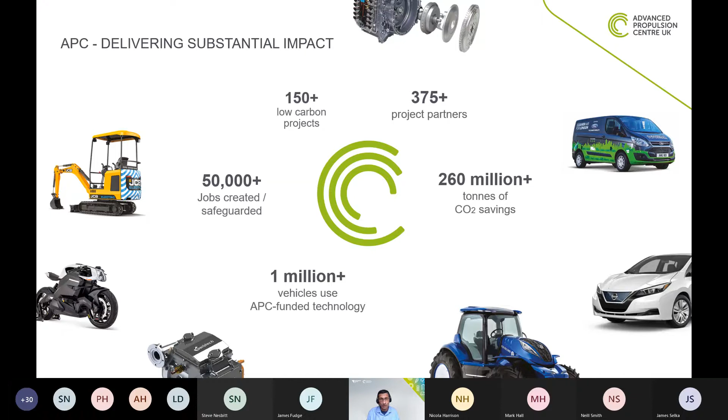Just a quick recap: the APC has delivered over 150 low carbon projects since it started in 2013. We worked with just about 400 project partners on these projects, delivering CO2 savings of 260 million and more, which is growing already. In fact, most of the vehicles coming out of those projects have reached a million on-road use as well. We've also done a jobs and safeguarding aspect of 50,000 plus, through our competitions and grant funded projects, as you'll probably know about.

However, where are we going now? There's another critical pivot in the road. It's a much accelerated CO2 program, as you know, from the petrol and diesel ban that the government made for 2030, and then the PHEV or HEV aspect that comes in 2035. It's meeting that 2050 agenda for net zero. That's crucial, so we have to look at automotive transport, which is 28% of the full footprint that the UK and Europe has to think through.

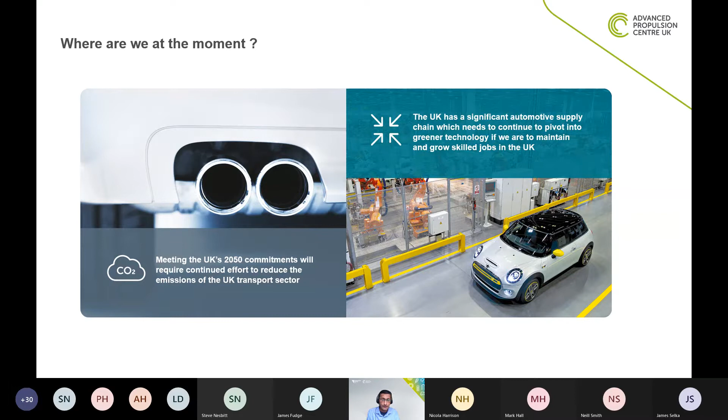The significant thing around the automotive supply chain that needs to be sorted out around greener technologies and electrification is where a lot of focus is being placed by government, and we'd like to make sure we get that right. One of the things that came out of this is last year the Advanced Propulsion Centre was able to have the ATF fund, the Automotive Transformation Fund. This is a brand new initiative, just under 400 million over 4 years to help progress that further.

We need to even stretch that funding capacity further. This one looks at batteries, motors, power electronics, fuel cells, all the sort of technologies required for electrification, but primarily around capital investment - how can we make manufacturing readiness for this is the key focus. Launched in June 2020, extremely popular, and it's one of those places where we can start to look at how new technologies can be brought into the UK.

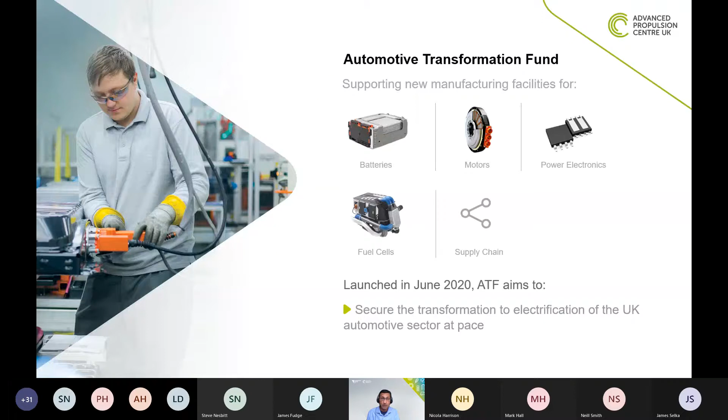What we've also done at the APC last year is launched an electrification report, available on our website. It helps articulate the opportunity within the UK: within batteries, 12 billion, within power electronics, 10 billion, and within electric machines, 2 billion. So there's 24 billion worth of opportunities.

What the report does is break down where those value chains reside - where is the cathode manufacturing and anode manufacturing for batteries, how do you go about making your decisions? What about electric machines - are you in the electric steel space, the assembly testing phase, magnet supply? How would you like to participate? This is our invitation to read the report to understand that part of it, the value part of it.

Just for this section today, we are going to focus primarily on roadmaps, and the APC delivered roadmaps with the Automotive Council. I guess, James, we've got somebody on unmute - if we could get that mute function enabled, please. Okay, so Automotive Council roadmaps.

The APC delivered the Automotive Council roadmaps last November at LCV, so some of you will be familiar with these. It was a virtual event at LCV where we brought out 9 roadmaps in different ways, where 3 of them are product roadmaps, looking specifically at the kind of fleets of vehicles that we have to understand the technology migration across them.

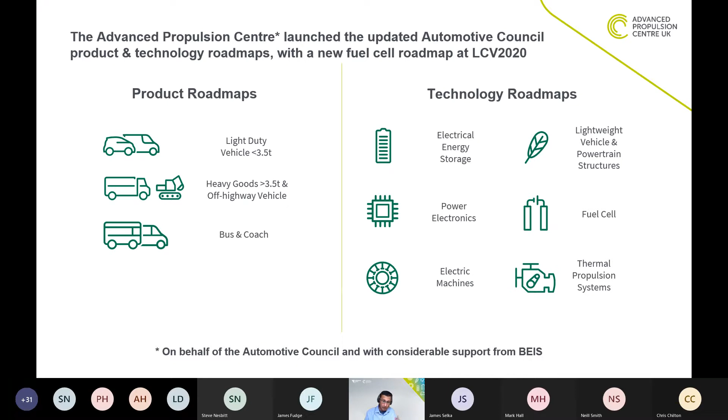So let's tackle how we built the roadmaps. Although this was done over a period in 2020 with the COVID aspects, we were able to use online tools and a way to bring communities together, running over 13 workshops across all the technologies, with 109 industry companies and different organizations participating in multiple workshops.

We then ran an online survey to ask experts around these technologies, with 38 participations and 147 industry organizations bringing in this rich feedback. Again, because it was digital through both Teams and Miro, we were able to reach out a bit further internationally to get that feedback, so the global reach this time round has been much bigger. The distribution across tier 1s, tier 2s, OEMs, academia, and other trade organizations is shown there, giving you a flavor for how we were able to get a lot of insight through this process.

So let me give you an example, and then you can take the time to read it in more detail. So the product roadmaps, I'll take you through the light duty structure to start off with, and the heavy duty and bus ones are there on our website, available for download. Together with it is a report as well, which I'll share more details about in a moment.

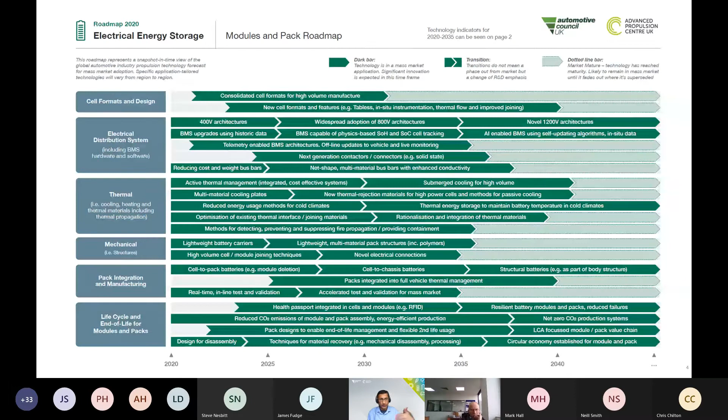Okay, so the next technology to move on to is electric machines. Similarly, a very rich area. We've broken out the roadmap so you can synthesize that by seeing machine architectures - what's happening with machine architectures going forward, what thermal management solutions electric machines will need, and specifically for electric machines, how do I play a role within windings, magnetics, soft magnetics? How does the winding technology evolve?

How can permanent magnets or alternatives to permanent magnets work? Soft magnetics and looking at laminations - what's happening with steels, how can this help going forward, or soft molded magnetics as well. And then manufacturing innovations are several parts of machinery, automation, and life cycle.

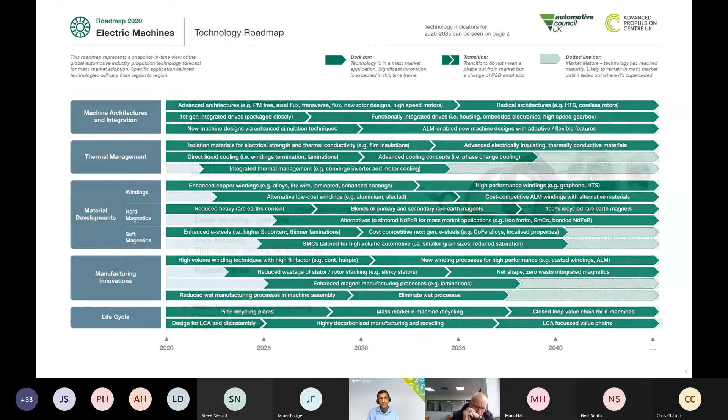So again, let's look at this from a supply chain perspective. From an architecture and integration perspective, you could easily look in terms of design and supplier commodities in modeling and simulation. If you've got integration services, putting things together, assembly services, bearings, axles, shafts - all of these are important for electric machines. Next, we're now operating them at very high speeds, generating lots of heat.

Also knowing that we need to operate within a particular optimal window to get the highest efficiency out of motors, which is 93% or more, 95% quite quickly. Cooling is important, thermal interface is important, insulation materials - all of that. If you're involved in that, you can easily participate in electric motors.

When it comes to the materials area we just mentioned about windings, magnetics, laminations, and their manufacturing, stampings is something very transferable - laser cutting, sheet stacking. You've got to get all the lamination stacks together, compress them together, and put a shaft through the middle. There's a lot of automated winding required, whether it be different types of winding structures like distributed or hairpin.

You will need precision engineering towards insertion of magnets with a glue system or a non-glue system. There's magnetization pre or post that you need to consider. And then, of course, the life cycle aspects of harvesting materials, with magnet materials being important. We have a separate report on magnet materials and the opportunity on our website as well, so please feel free to reference that if you need it.

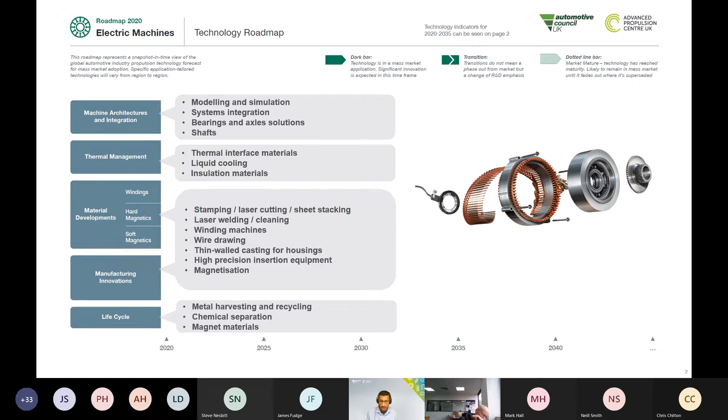Okay, and then the third one is power electronics. Now, this is a little bit more of a trickier one - this is a very specialist skill. It's not one that transfers in like we've talked about with batteries and electric machines. These are specialist areas of semiconductor manufacturing and packaging going forward. So it's more niche, but there are places within its cooling systems, within its materials, that you could look at playing a role within.

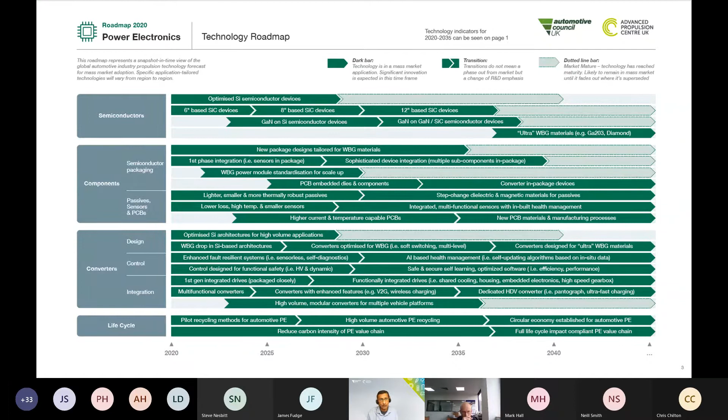So the way we've broken this out for you at today's presentation is to say semiconductors - right, we know it's highly specialized. You'll be looking from silicon to silicon carbide, going to GaN materials, gallium nitride based wide bandgap materials, but that's all about specialists within semiconductors growing these materials, and the cost curves needing to come down to a particular point for this efficiency to work. But on a vehicle, where will you find these components?

So you've got three places to look for these. You've got the inverter, which is bringing your DC power from your batteries into your motor, so on an inverter there's several power electronics there. I've just shown you at the bottom some of the roadmap targets we've got - DC to DC, step up voltage, step down voltage. All the voltage needs to be regulated depending on the function it's going to.

So DC DC on board, and then you've got the onboard charger, the charger itself that will need lots of electronics. Now each one of these has a particular need for semiconductors, packaging, passives, sensors. They'll have a whole host of bits, but they also need cooling, thermal management, insulation material, sensors, and then furthermore modeling, systems integration, and software development to allow these to happen.

So there can be places to participate in these technologies as you go into the vehicle integration topic around power electronics.

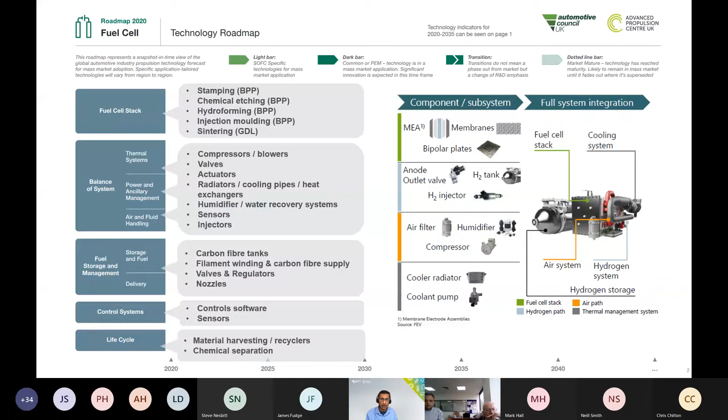So there's a lot of information to digest, which is why earlier this year in February we wrote a report per each roadmap, so you can take your time reading through. There's about 25-30 pages per technology to understand the background, which can give you a little more insight on how you'd like to play a role within this. The links at the bottom take you to the technology roadmaps page at the APC website or the product roadmaps page. Both have a report on it per the information I've shared with you right now.

The last thing to mention is that we're now writing up and publishing in the next few weeks, pretty much in May, new reports called Industry Challenges. These are research and innovation topics of the highest priority within each of the technologies I've taken you through, within batteries, within e-machines, within fuel cells. Where is the R&D needed? We list out the high priority topics, 10 or 12 topics, and within each one we give you research examples of the kind of places where academia, industry, and funding is focusing at the moment.

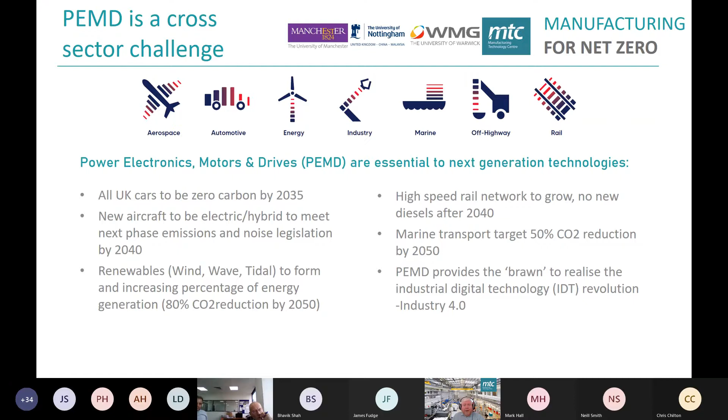As mentioned, we're part of a very broad national consortia of capabilities, representing 11 research and technology organizations and 23 plus and growing universities. This national network of capability is ready and at the disposal of industry to draw upon to support and enable the journey towards these net zero technologies. There's over £300 million of invested and resident equipment across these organisations that can be leveraged to best effect as needs be to support your respective journeys.

These regional clusters, notionally in the Northeast, Scotland, Southwest, South Wales and the Midlands—which is actually a band that stretches from the southeast up to the northwest of England—are available for everyone to use, everyone to access.

To put some context into the rationale here, here's an extract of 2 of the technology roadmaps that Bhavik's already presented, recently released by the APC and the Automotive Council. The key message in both of these is, roughly translated, about doing more with less materials in a smaller package.

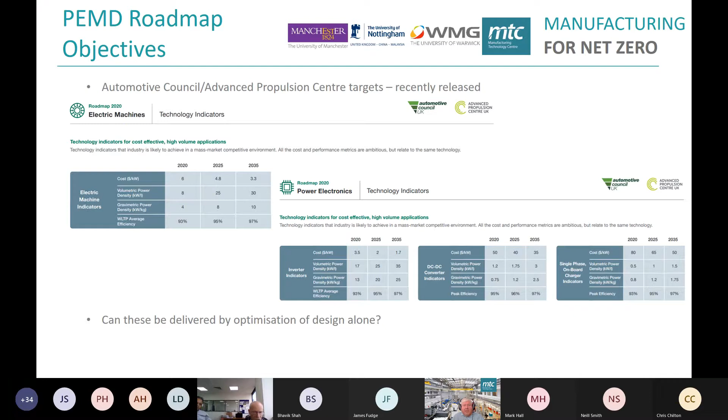That's why at the top right hand corner we've glibly utilized the statement 'manufacturing for net zero.' It's about the systems base, not just solely processing, as it were.

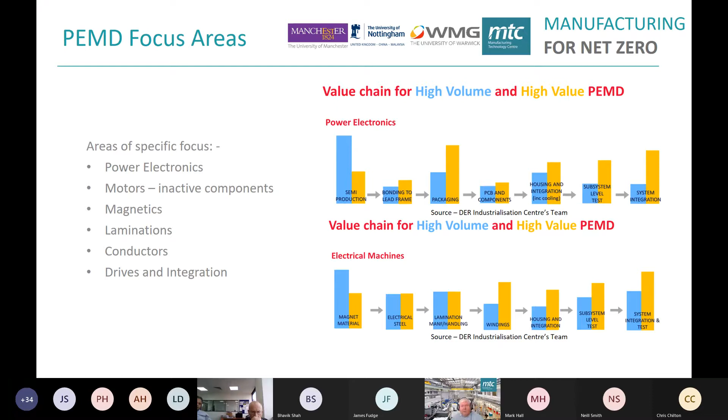First off, we'll talk about power electronics. This is a very broad spectrum of major components, some of which are listed on the slide. The design of these systems is heavily influenced by the challenging electrical and environmental conditions within which they are applied, so key areas of interest are reliability and thermal management.

Technologies such as double-sided cooling offer reduced thermal resistance, more power for a given die area, higher speeds and efficiencies within switching devices, and enhanced reliability and longevity. This, combined with a 20 to 30% reduction in footprint at a module level, has significant appeal. It answers some of the key challenges around integration, doing more for less power density, and so forth.

Lower materials utilization demands, clip bonding technologies partially replace the standard wire bond connection between die and lead with a copper bridge, which is also soldered by solder paste. That's akin to an existing technology or processing route prevalent in electronics and power electronics industry, but offers significant benefits. It would be considered a minor change for certain key actors in the electronics industry to adapt to provision of systems or components into power electronics requirements.

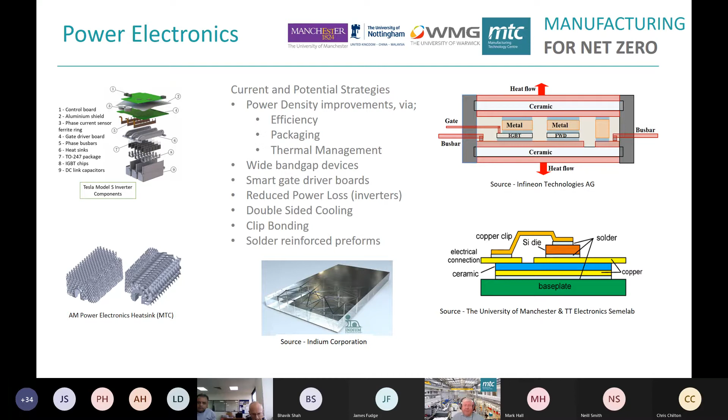Many different advanced manufacturing methods exist for these structural and load-bearing components, such as radial forging and rotary forming for cylindrical or rotating parts. The utilization of non-metallic materials or combinations of materials is commonplace in low duty cycle applications already, such as white goods. But translating these to more arduous use cases is a developing trend.

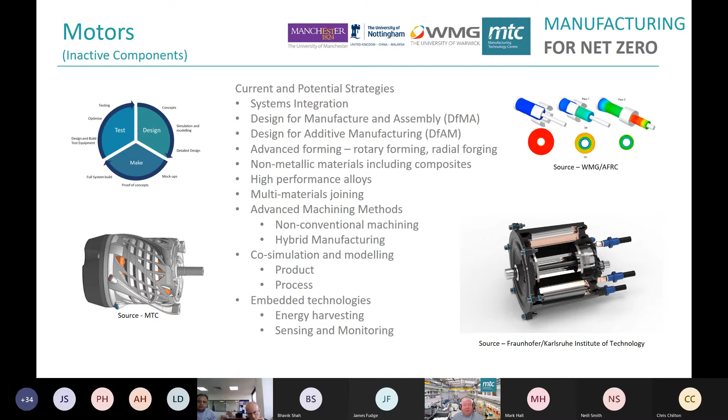The indirect benefits of using materials which are mostly recyclable rather than mined raw materials equally cannot be underestimated. The story around magnetic materials compositions, their sourcing and abundance, and potential for impact to the environment is well documented. The focus has to be on how we use less of these, yet still attain the same levels of performance. Some studies suggest as much as half of the material volume of magnets within an electric motor are not actually contributing to its performance.

Manufacturing methods currently deliver regular shaped preforms, which do not lend themselves to mechanical integration or the opportunity to optimize the flux density associated with them. So near or net shape methods are needed to improve material utilization and efficiency. Clearly, the case for recovering and reusing materials is a strong one too.

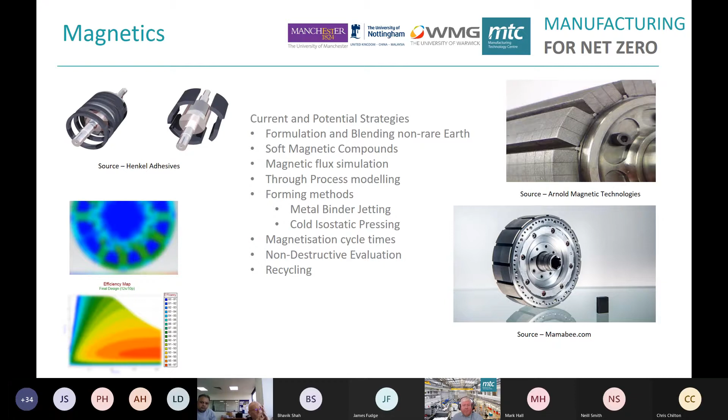Many projects of work have been conducted around electrical steels and laminations, so we have a good understanding of the requirements and the impacts that discrete manufacturing stages can have on their resultant performance and/or function. But the story is not fully joined up yet.

Improvements in through-process modeling, simulation, and therefore prediction need to be symbiotic with the virtual engineering methods used for product development. The totality of these will yield far greater materials utilization, in conjunction with greater opportunities for combining features to deliver additional functions. The migration towards thin and ultra-thin gauge laminations is not without its own challenges.

These are components that no longer have the mechanical stiffness to support themselves with regards to their formation, handling and stacking. As a for instance, typically laminations can be in the order of 0.3, 0.25 millimeters thickness. Aspirationally, we want to move to laminations that are 0.1 millimeters in thickness.

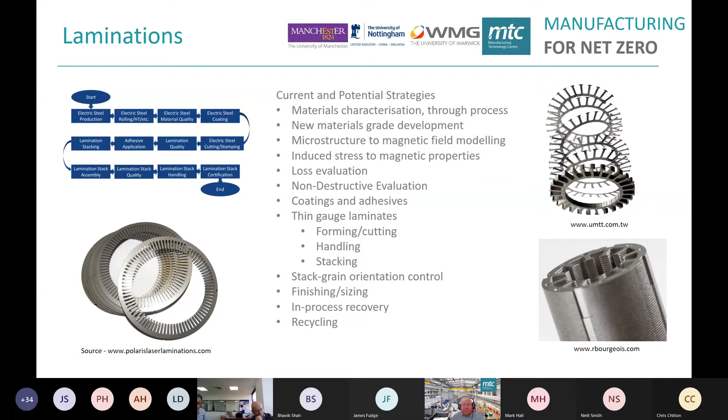One of the technology groups demonstrating the greatest level of innovation and development are the conductors, the active windings and associated bridges and busbars, with many different product solutions, including drawn wire, Litz wire, and hairpin winding solutions, all seeking to increase the densification of windings.

A good number of manufacturing process innovations are ongoing already. However, these are primarily focused on products with regular cross-sectional area, and within this present some difficulties in attaining a truly optimized conductor package.

Integrating the manufacturing methods available with the intent of delivering bespoke cross-sections optimized for their respective locations within the winding package could lead to increased gravimetric and volumetric benefits, i.e. more power per unit volume or per unit mass. Elements of fundamental research are required, but the scope for near-term industrialization and scale-up for some of these are within our grasp.

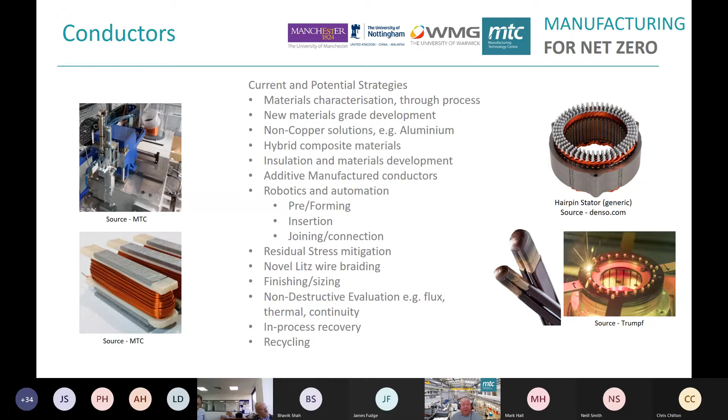Integration is fairly obvious, but what do we mean by drives? Well, using Will Drury's definition from the Driving the Electric Revolution Challenge program, it is the digital controls, passive components, thermal management, and overall mechanical and system design.

Embedding systems, or integrating the functionality of a number of systems into a smaller number of components, is in essence the approach being taken here in the physical domain. In the virtual domain, the co-simulation of multiple attributes is the next big thing.

For example, the current approach to structural optimization considers material form to achieve stress and strain requirements, but not heat transfer. Why not? There is an area of opportunity for the development of key simulation capabilities, as well as the physical domain activities listed.

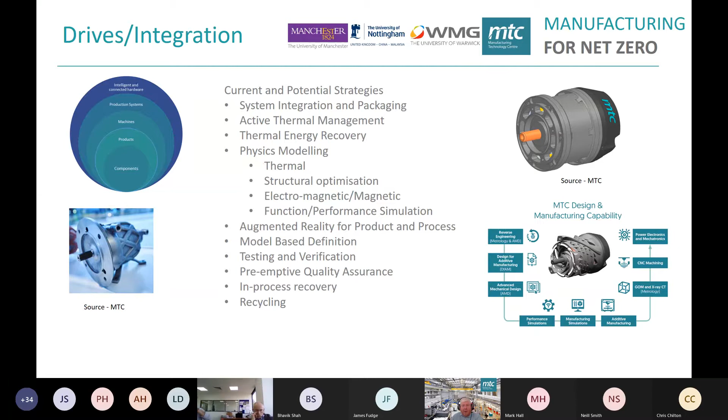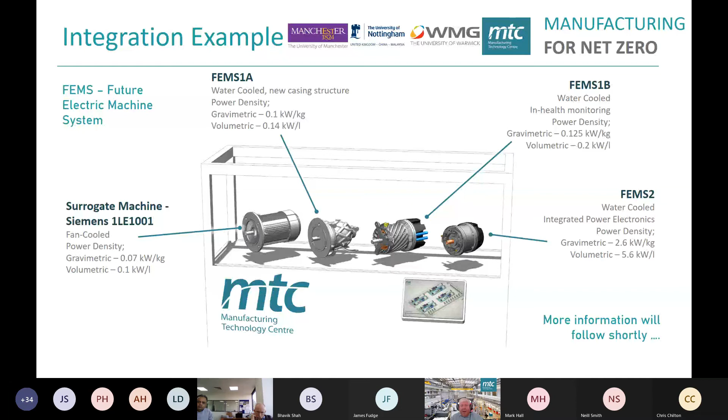We're about to publish more information about the latest iteration, FEMS 3, in the not too distant future.

I've talked about a number of manufacturing process advancements in the previous slides, be they specific processes, improvements in materials utilization, or virtual engineering methods. But we cannot ignore the requirements and expectations for product utilization through life and into end-of-life activities, with the harvesting of high-value materials a significant consideration, resonating Bhavik's earlier comment.

Paraphrasing one of my colleagues, we are developing for all of our futures, not just today. So it's really important that we consider this factor.

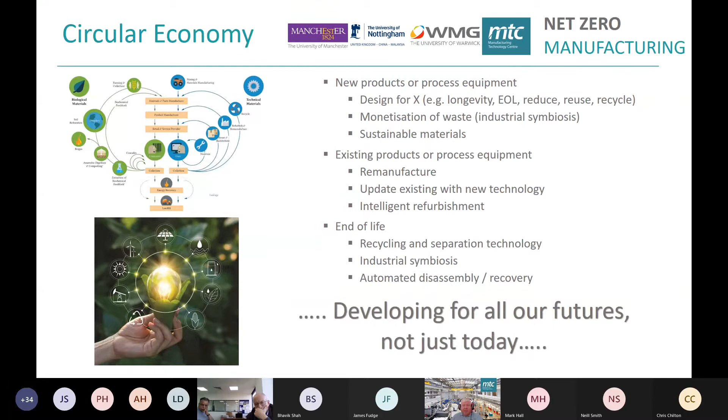So, retracing my steps back to the start of this conversation, the targets are clear, albeit continuously under review. The route map to achieve them is based on doing more with less in a smaller package. In our opinion, this objective cannot be delivered by product optimization alone, and only by harnessing the simultaneous technologies, advances within manufacturing processes and product design in unison, will we be able to get there.

We need to consider the function we want to achieve, the features we need to deliver these, and what form represents the best physical solution. We therefore need to improve and iterate our thinking from design for manufacturing and assembly to design with manufacturing, where manufacturing refers to the materials development, creation, formation, processing, and assembly of truly integrated solutions.

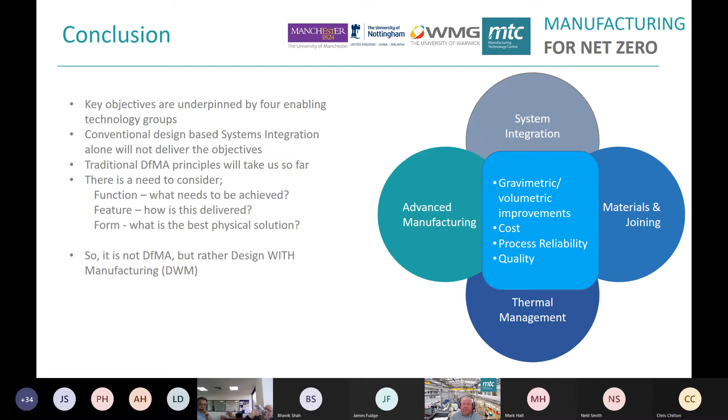Should you require more details on one or more of these items, then please feel free to contact any one of us, and we would gladly help in any way we can. We are a conduit to any of the RTO or academic resources needed, if there is a particular requirement, challenge, query, or concern that none of us are able to give you an expert answer for in the very near term. We can signpost you to the most appropriate authority.